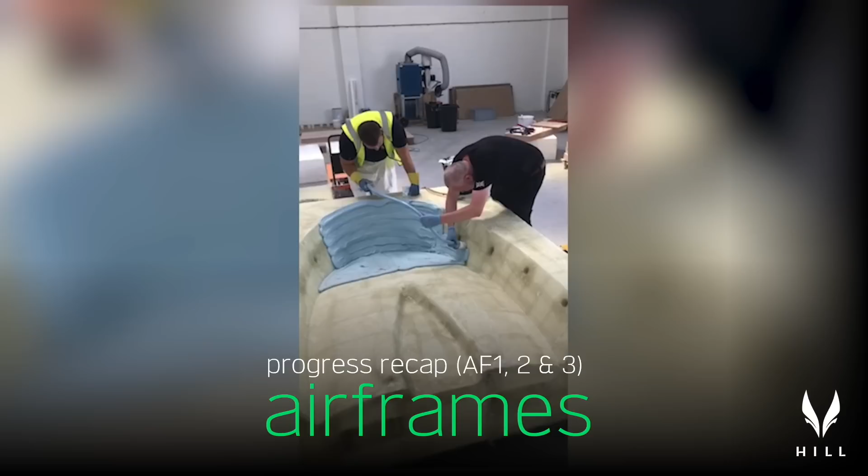Thanks a lot, Ruben. Thanks a lot, Misha. Welcome, ladies and gentlemen, back to DC1 for a crammed update tonight. The update will take the usual format. We'll start talking about the airframe developments that have been going on over the last month or so. We'll then get into engine and drivetrain, talk about the DigiCockpit and all the software and hardware developments, and then wrap up with some exciting news. So let's get started with the airframes.

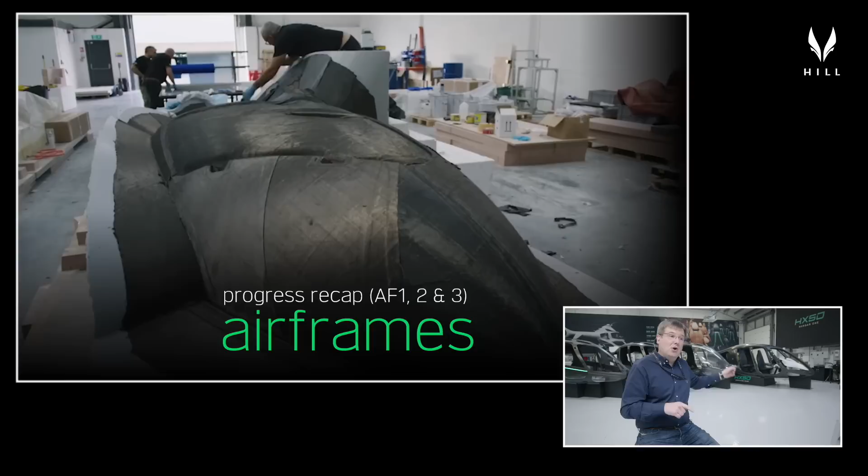As you'll remember, over the course of the last year we have developed a composites facility from scratch, developed patterns, developed molds, built the staff and the workforce, and then built no fewer than the first 5 HX50 airframes. Before we get into the details of what we've been doing recently, let's have a quick recap about what we've done over the last 6 months or so.

Airframe 1 was very much about making sure we could use infusion to develop cost-effective composite aerostructures for HX50. That's key to unlocking the power of composites at a price point that GA can afford. So this first fuselage was very much about: can we stick the dry carbon fiber into the molds? Can we hold it in place? And then can we distribute the resin around the mold effectively?

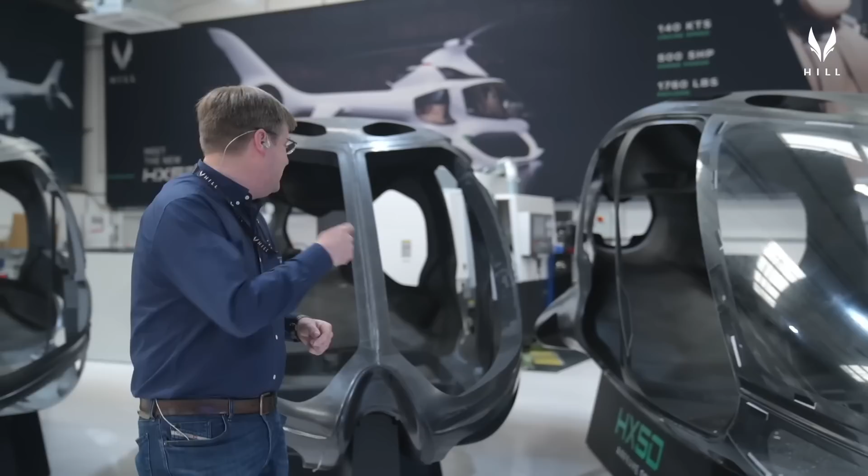We did that, and then with the second airframe we moved on to try and improve the detail in the molding—trying to resolve things like edge details, and starting to look at how we template and how we position the foams and the B surfaces into the mold.

The third airframe then allowed us to perfect that process on the outer skin. So by the time we'd got to the third one, we're resolving the edge details and all the intricacies of the carbon structure to production standards.

And then with Airframe 4, that was where we were due to bring all of the elements together. So let's go back and have a look at what we did with Airframe 4.

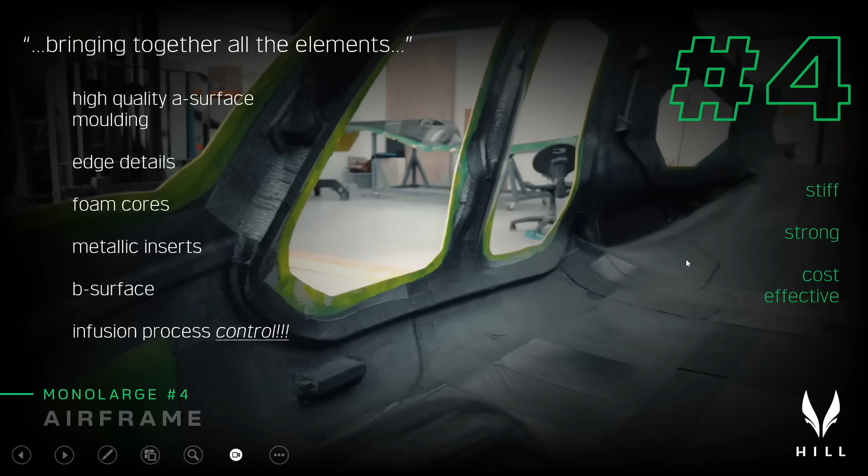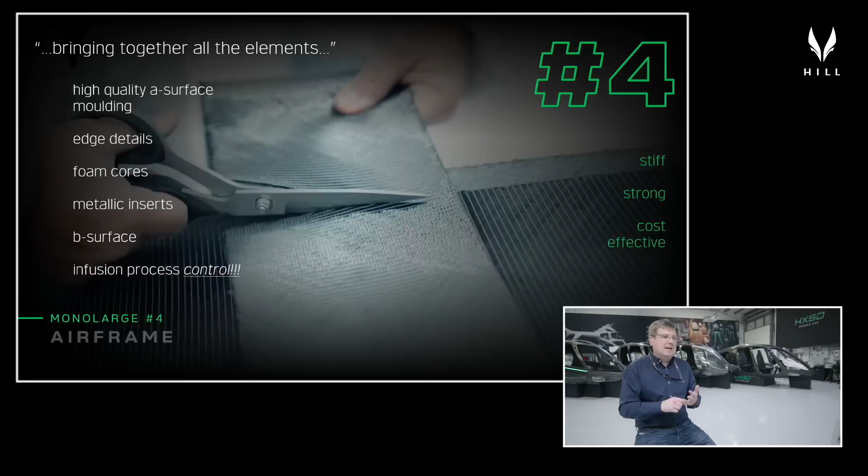Airframe 4 really brought absolutely everything together—everything that you needed to have a high quality, low cost aerostructure. All the edge details were in, all the foam cores were in, all the metallic inserts were in, the B surfaces were in there that give the structure its strength and its stiffness, and then it was about perfecting the infusion control.

Now this airframe was actually in the mold on the day of the last AMA, and as you'll remember me reporting, we had a vacuum hose come off and the thing slumped in the mold—a process failure, really. But that taught us a lot about infusion, it taught us a lot about process control, and when we actually got the thing out of the mold and had a look at it, what it taught us was these structures are incredibly strong.

So we were able to refine the process controls, we were able to refine the way that we do the infusions, and move on to the next airframe.

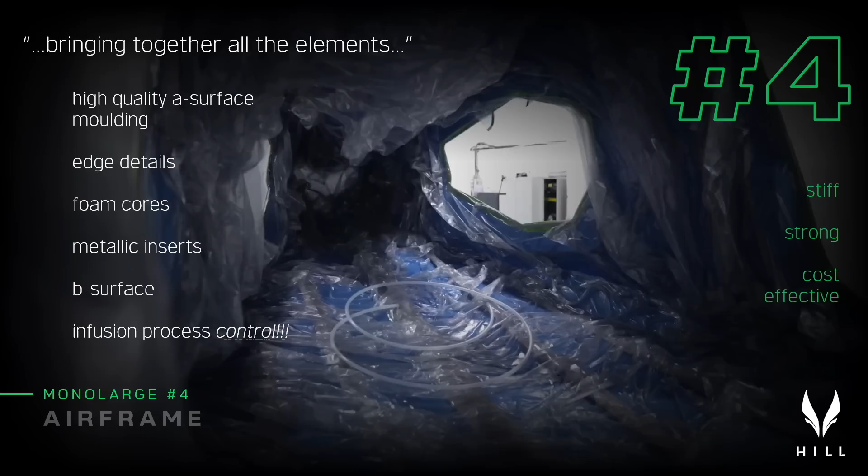But above all else, what that proved was we can make stiff, strong and cost-effective aerostructures using the processes that we've developed.

We then moved on to airframe number 5. This was really just a case of refining it, trying to get to the point where we're making a perfect aerostructure that's worthy of a structural test. So in this fuselage, we'd got a fully featured moulding, with both the A and B surfaces in there.

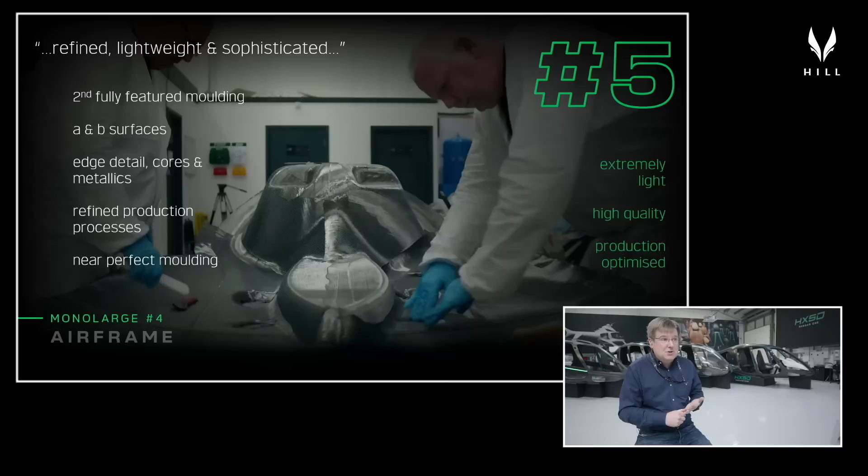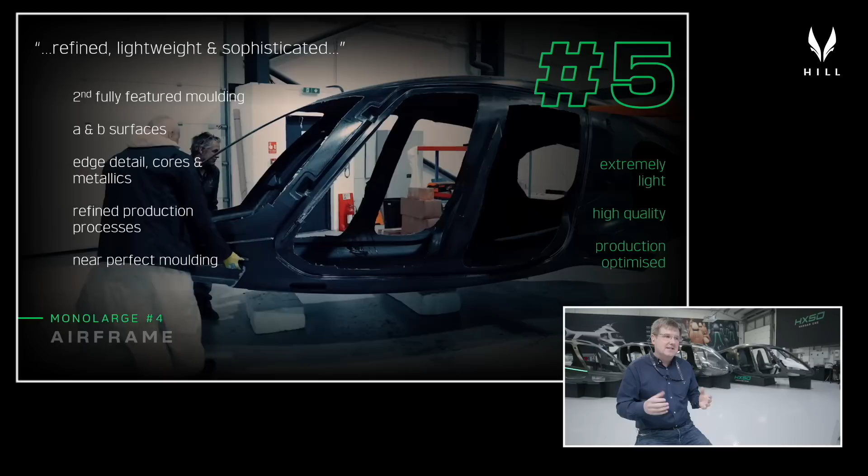Off the back of the latest FEA analysis we've been doing on structural optimization, and the findings from the inspection of the fourth fuselage, we managed to back the laminates off a little bit and reduce the weight dramatically on the fifth one. All the edge details, the cores and the metallics were in there, and we really refined the production processes to deliver what is a near perfect moulding.

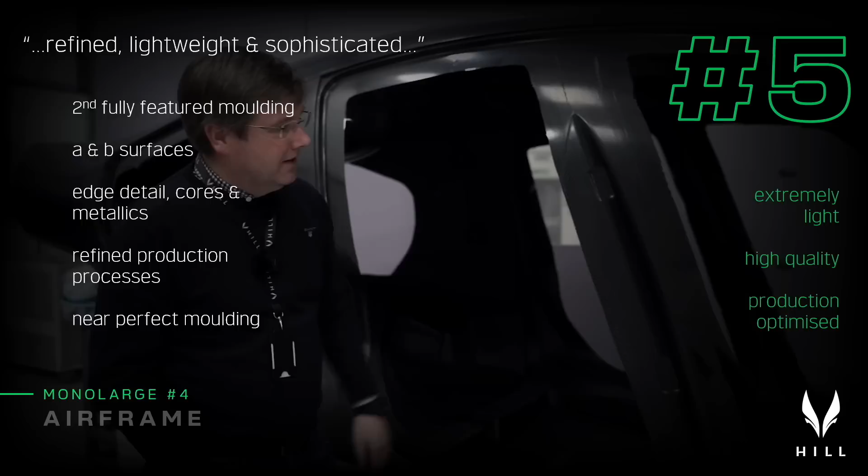And what we found when we got this out of the tool was this airframe is incredibly light. The whole monolarge, with everything in there - the foam cores, the metallics, everything you need to attach all the mechanical components - is just 50 kilos.

Now obviously it will put on more weight - we've got to bond in some internal panels to make the floors and the fuel tank closures, and we've got to put doors and windows on it. But we are on track for weight, we are on track for performance, and we're now able to produce these mouldings very cost effectively and very quickly, even without yet implementing the automation that will be used in production.

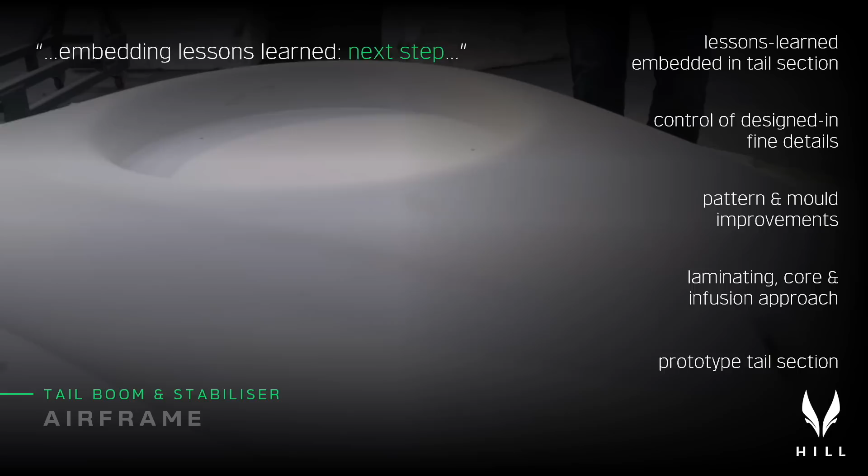So we took everything we'd learned from all 4 of these airframes and brought that together - from pattern making, mould making, all the way through to part making - to deliver what was intended to be a production grade suite of patterns, tools and moulds, using the tail boom, or the aft half of the fuselage, as a dry run for that. We basically embedded everything we'd learned in terms of vacuum integrity and surface quality.

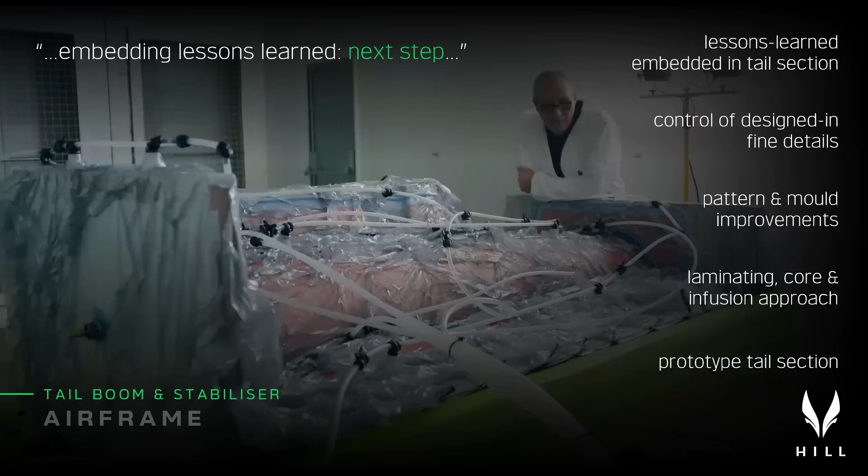We released all of the refinements on the gantry mill to get better performance out of the mill, better quality machining right from the get-go. And then we also took it as an opportunity to avoid designing in some of the challenging features that can make the production process more difficult - again reaping the benefits of that vertical integration, where the people that design the stuff are in the same company as the people that make and handle the stuff.

All of these things were rolled out, and over the course of the last month or so, we've actually built the very first HX50 prototype tail section. We'll tell you a little bit more about that later, but fundamentally, over the course of the last month, we've essentially got to the point where we're building high quality monolarges, and now we've built the very first HX50 tail boom as well.

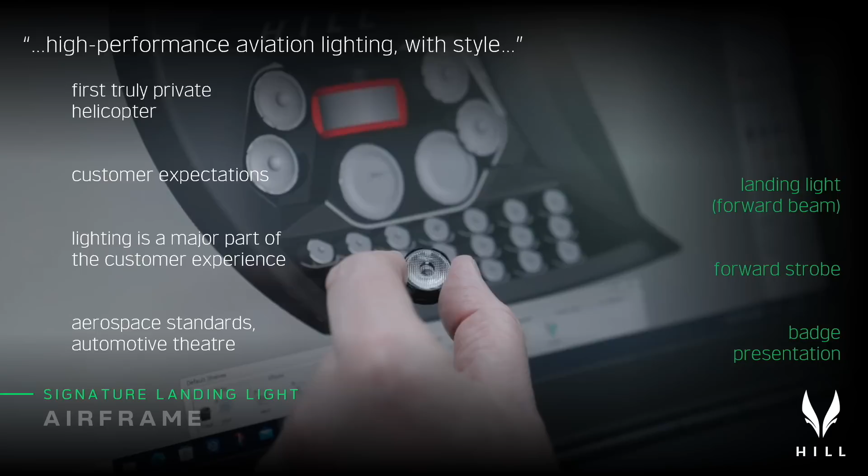So one of the other areas we've been working on over the course of the last 12 months is the way we deliver the lighting on HX50. We've set out to deliver the first truly private helicopter. And while we're speaking primarily to people already in the helicopter market, as our business grows and our market grows, it's important that we re-expand general aviation to what it used to be in the 60s and 70s - and to do that, we have to have broader appeal.

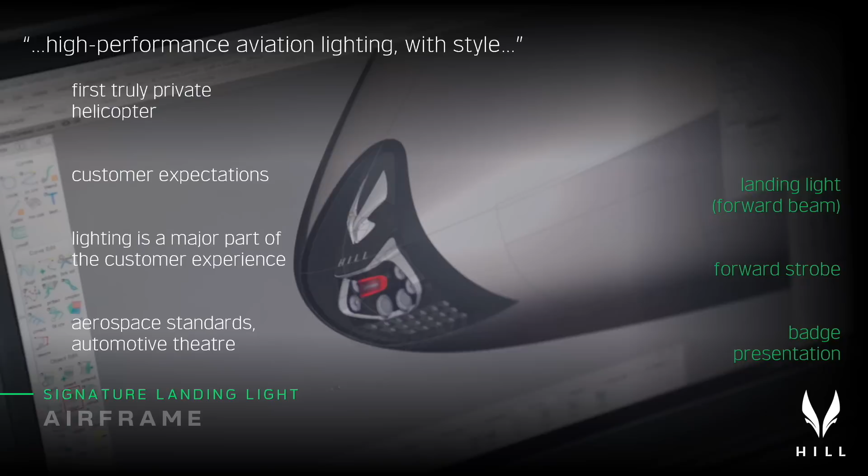So one of the areas we've been keen to excel in is making sure we exceed all of our customers' expectations in terms of the presentation of the aircraft, and lighting is one of the major areas we need to excel in to deliver this. So we're delivering aerospace standard lights that are fully compliant with certification regulations, but with the theatre of premium automotive lighting clusters. What we're looking at here is the nose cluster, which sits in the very front of the airframe behind the windshield.

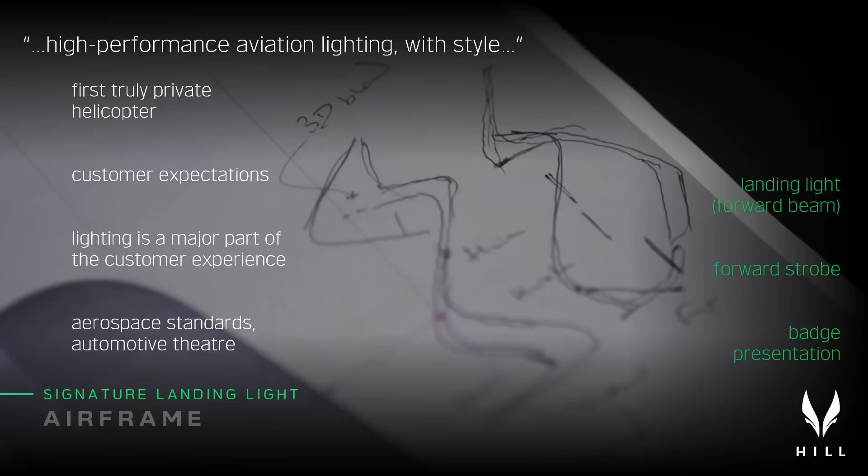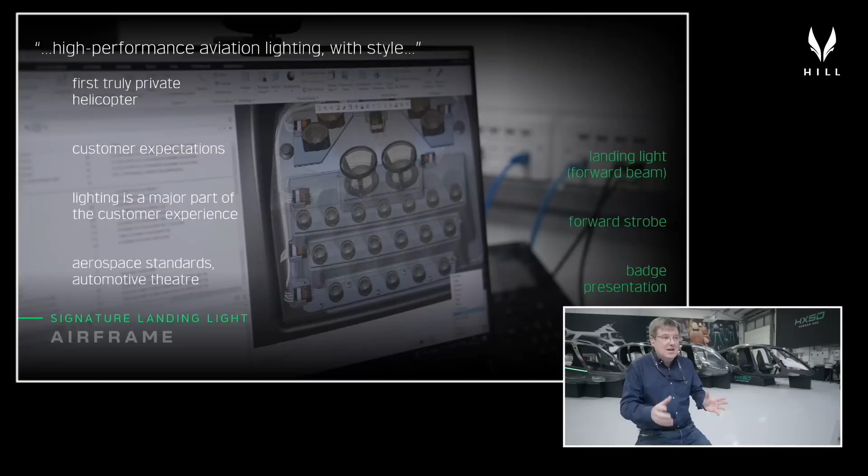At the top of that cluster, it presents a 3D form of the Hill badge, and below that you've got your dual focus long range and short range landing lights, which work in sympathy with the wingtip lights that provide a broader, steeper coverage. These lighting clusters are designed, manufactured and optically optimized by us here at Hill, to make sure we can deliver automotive grade lighting presentation and the jewelry that bedecks the body of the aircraft, at a price point that works for general aviation.

So within the nose light cluster, you've got the badge, the landing lights, but also the forward portion of the strobe light. There'll be much more on this over the course of the next couple of months as we prototype this and do all of the optical testing on it. But I thought you'd be pleased to see how this is evolving.

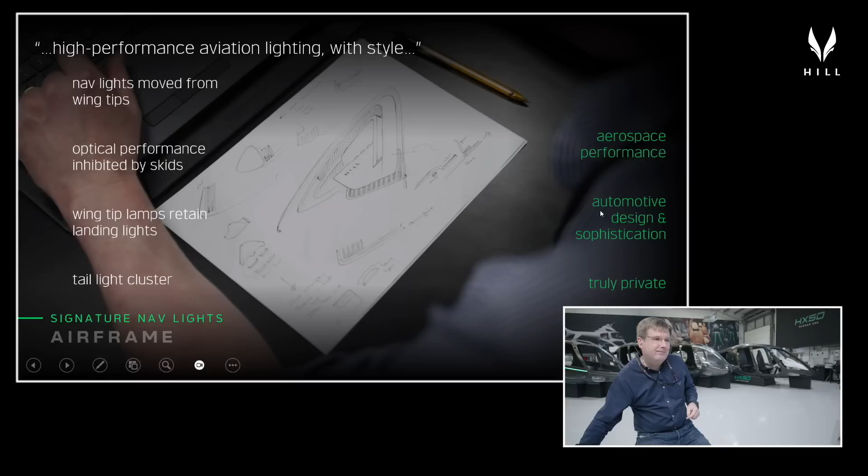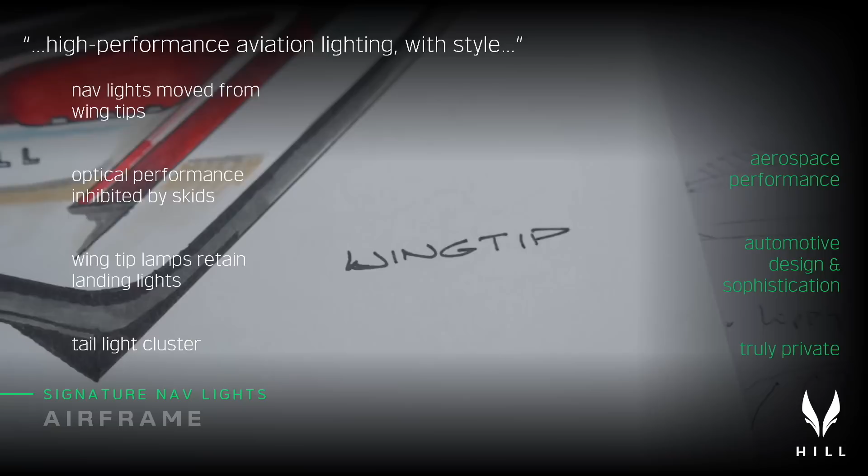Similarly, the wingtip lights originally were going to house both the green and red navigation beacons, and also a portion of the landing light. With the addition of skids to the airframe at customers' request, it now means we can't fully comply with the lighting in those wingtips. So we're now using the wingtip lights to extend the landing light coverage, and then present that in a way that dresses the airframe properly.

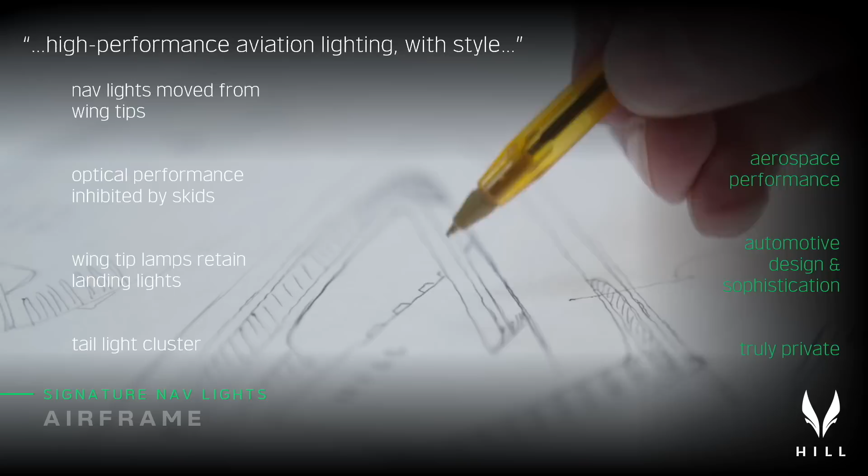Henry's been extremely busy over the last couple of months, refining this, fitting it in with the structural design of the aircraft, and working with Hayden, our optical specialist, to make sure all of these lights are fully compliant with the regulations. What you can see on the screen is where Henry's up to with the tail light at the moment, that provides both the aft navigation light and also the aft and lateral portions of the strobe light cluster. So again, aerospace performance, but automotive levels of design sophistication.

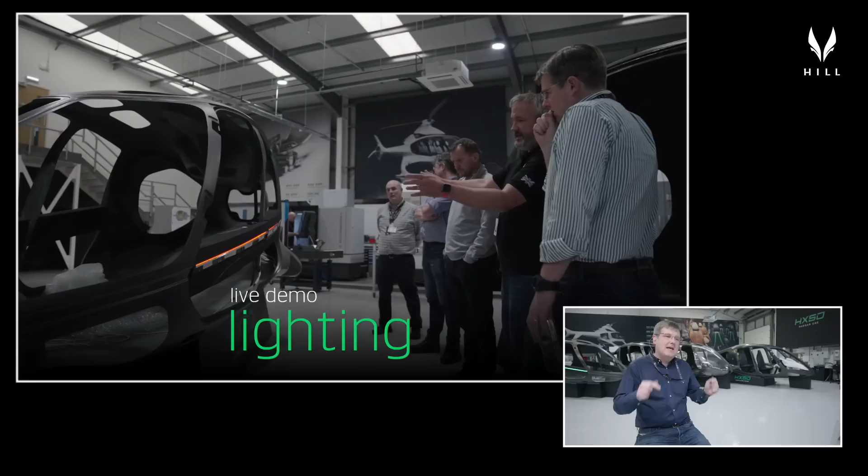One of the other areas we're very keen on is making sure the aircraft is presented essentially to the same level that a premium automotive car would be. Right from the early days, we've been discussing the idea of using a pinstripe of colour that runs along the top of the chrome strip, punctuating the waistline of the aircraft, to give you a sort of handshake when you first open the helicopter with your key fob. The lights will draw down to the nose.

What the guys have been doing over the last month or so is implementing the lighting clusters, the diffusion technology, and working out how to present that in a way that's subtle, classy, and compliant with all of the regulations. At the moment, we're just exploring a number of optical solutions for delivering everything we need before we put the high quality optics and finishes over the top of that.

But if we go over and have a look at fuselage 3 over here, what you can see is we've got one of the diffusive elements in the fuselage for the green navigation light. The idea is this light will be embedded in the door and the chin window here, and when you open the helicopter, it'll draw down to the front as you flick the navigation lights on. It sits behind polarizing filters, so you don't get any stray light where you're not meant to. And it works in conjunction with a primary navigation light that sits just down here to cover the range you can't quite get to with the stripe.

The idea of this is it just gives you a completely distinctive signature when you're flying at night in the sky, and brings the aircraft to life that bit more than a conventional bulb in a box would do. So we're really pleased with how that's coming on. Don't read too much into the presentation of that at the moment, that is purely an engineering trial, and the level of sophistication will come once we finish the nose and the tail light. So very pleased with how that's coming along.

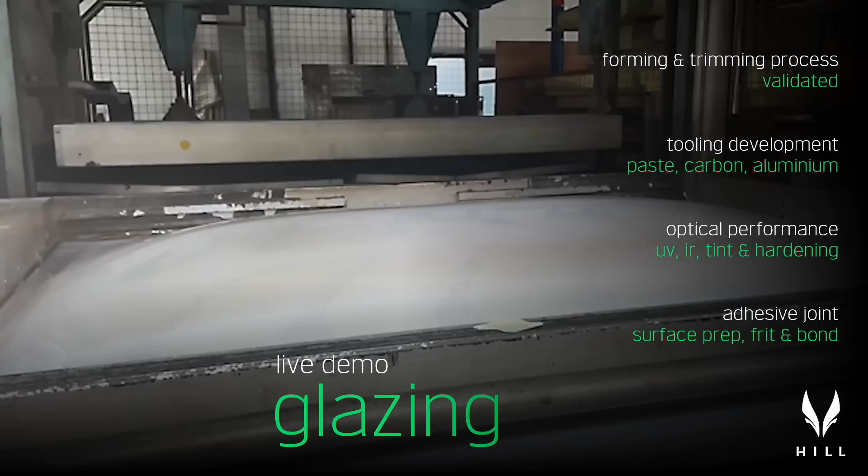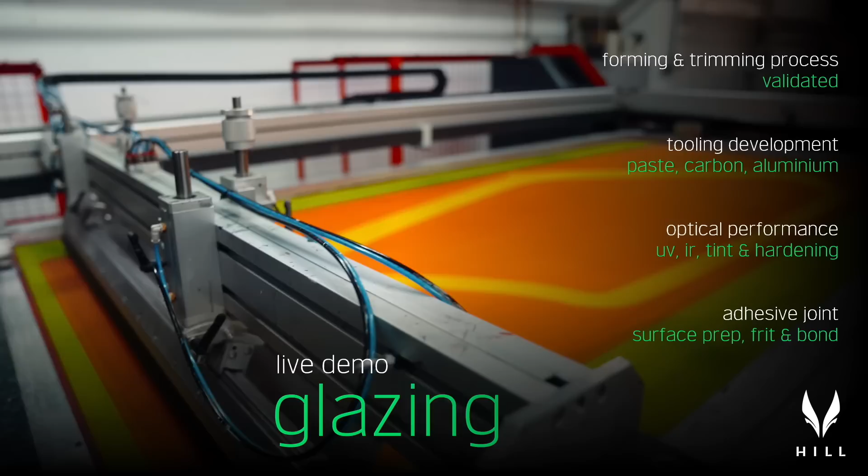One of the other areas we've been working on intensely with the fuselage and the aircraft development is the glazing. It's absolutely crucial, given the high cruise speed of HX50, that we have impact resilient windscreens. For that reason, and to control costs, we've been working over the last 12 months or so to develop the forming and trimming processes to produce both polycarbonate and acrylic windscreen panels that have the necessary UV, infrared, tint and hard coatings on them, as well as the blackout or frit around the periphery that allows us to create a high integrity bonded joint back to the airframe.

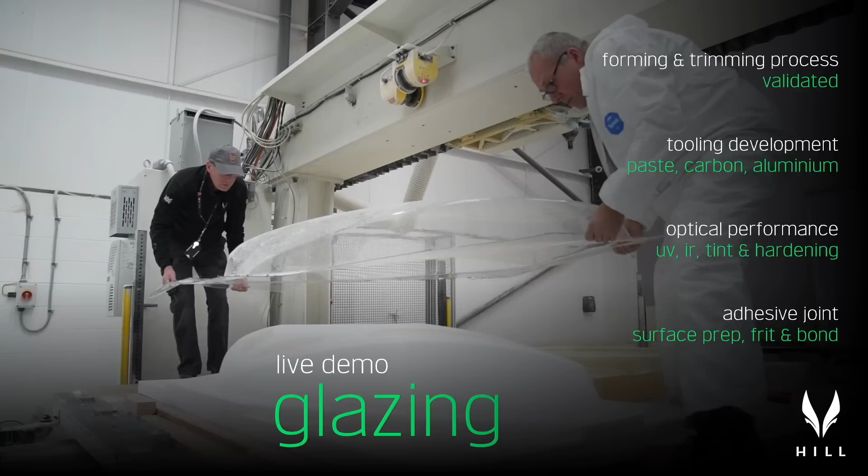What we've been doing over the last month or so is primarily focusing on the tooling, because in order to create the kind of optical quality you need, the blemish-free, distortion-free view through the transparent regions, we have to make sure the tooling we use is totally seamless. The original prototype tools we made for the windows were made in a low-cost way, just to prove we could physically form the shapes we needed using the vacuum forming process.

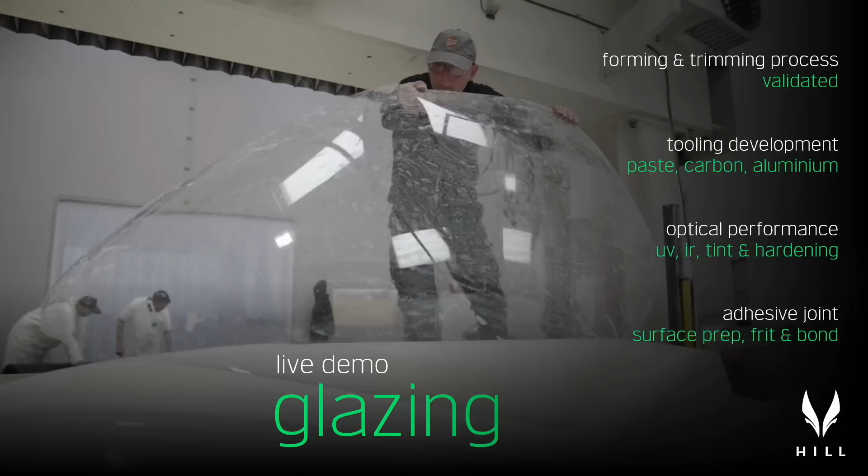We validated that, and now we've got to take the tooling to the next level to make flyable aircraft parts without any optical distortion. We're proving this process by cutting back and pasting up some of our existing tools, and then once we've done that, we'll extend that to either carbon or highly polished aluminium tooling to get the optical quality.

What you can see the guys doing here is proving out the trials of the polycarbonate and making sure that we can physically trim and handle the polycarbonate in the same way as the acrylic.

The other thing we've been developing is the physical frit or blackout layer, which I can show you down here on the floor. What you see in front of you is one of the recent moldings of a forward windshield panel. We've got a high quality optical molding here, but we also have to create this blackout region that sits within the area we trim the window, and this allows us to essentially hide the bonded connection that goes back to the airframe.

The other little details we're building into this is the dot fade that we use to give it that air of sophistication and to present it in the same way as you'd expect on an automotive vehicle, so you don't have that harsh black line where the airframe transitions from solid opaque material into the transparency. And all of that has been carried over.

We've still got a bit of work to do in terms of finding the right combination of the frit material and adhesive so that we're not limited by the adhesive strength of the blackout ink or the coating we use here. At the moment, that's not quite strong enough, so we need a little more development on that. But aside from that, in terms of the process, the delivery of the printed blackout and the tooling solution for this, we're flying along with it at the moment. So really pleased with how that's coming along.

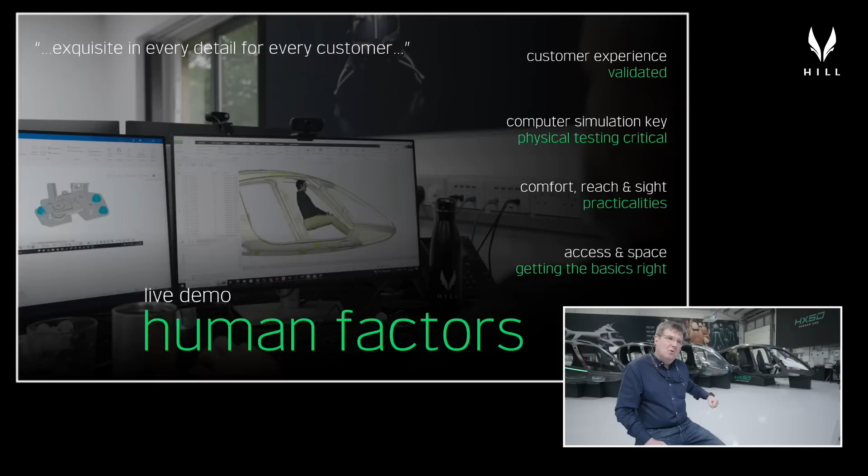So we want to make sure everybody's comfortable. We want to make sure the view's right. We want to make sure that collective, which some people find novel, works as we expect it to with the armrest. We want to make sure that the cyclic range works as we want it to, and we want to make sure the access is right to the aircraft also.

So what we've done is we've turned Fuselage 4 into a human factors mock-up, and what I can show you now is some of the key findings from doing that piece of work. Don't be put off by the appearance of this — it's meant to be quick and dirty, just to validate as quickly and effectively as we can that all of the features we need to work properly in here work properly.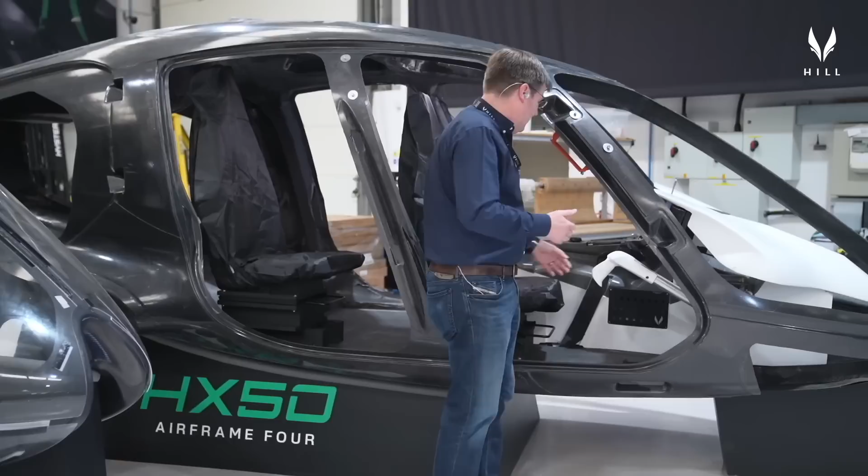If you just come around here a second, Josh, what you can see here is we've presented a lot of the airframes previously about 100 millimeters higher off the floor than they sit in reality. This airframe has had its base cut down and sits at the actual height that HX50 will sit at on both wheels and skids. I'm 6 foot when I stand up straight, and the seat is at a convenient height for me and for people a little bit shorter than me. One of the benefits of our cyclic is that you can lift it up out of the way to slide in underneath, so access into the helicopter is comfortable and fairly straightforward.

The first thing you realize when you get in is that everything we wanted to deliver in terms of the cosseting flying experience is delivered in spades with this. The digital cockpit looks absolutely fantastic.

My personal concern that this was going to block too much of the view was unfounded. I can see easily less than half a meter in front of the nose of the helicopter, and that's without using any of the transparent background technology we've got on the DigiCockpit.

The start panel falls immediately to hand, so starting the helicopter is as simple as power on, avionics on, start, and the reverse to shut it down. The collective, which some people found a little contentious at first, falls immediately to hand and sits really comfortably in the normal flight position.

As you can see, my arm comfortably clears the armrest, and it's quite easy to rest my elbow on the armrest while the collective's in the flight position.

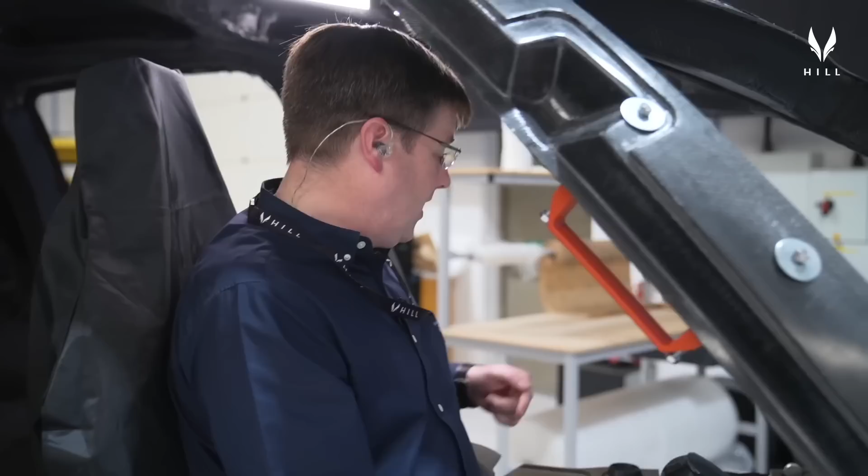Just as intended, Josh, if you want to come around here, the Digi cockpit and the IPI sits right next to where my hand rests naturally. So my hand rests where the puck falls, and the IPI for our audio panel, our comm radio selections, or any of the other key functions are immediately at hand as well.

The general presentation of the cockpit, the aspect out of the fuselage, the room and space that I'm afforded is everything we wanted it to be. And of course the full-size iPad front and center in the cockpit works really well too.

We've been exploring the level of adjustment we wanted to include in the aircraft. The seat range allows for someone up to about 6'6", and slides forward to someone well below the 5th centile, so we've got adequate room for the largest and the smallest.

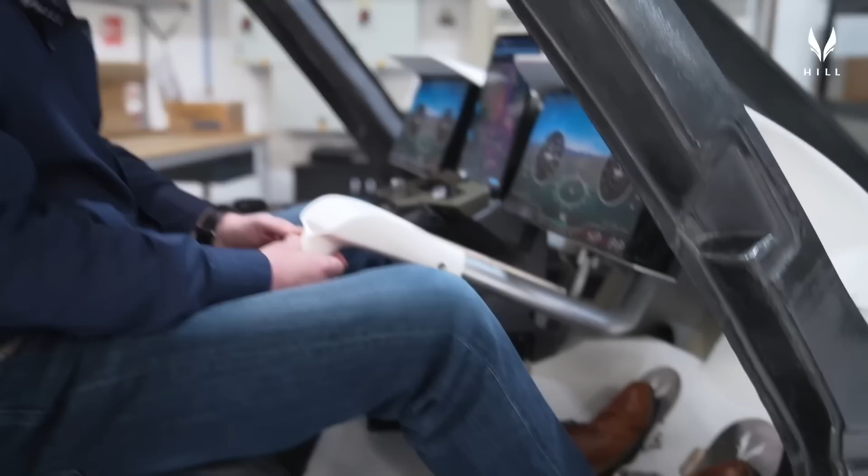The cyclic range is comfortable for everybody in that size range as well. The only thing I think we're going to end up altering before we go flying is the range of travel on the pedals - I think that's a little too little at the moment, and we need a bit more adjustment on the pedals.

But overall, the overall experience in here has been really fantastic. I'm delighted with how this has come out. Very pleased with how all of that's come together.

There are a couple of areas where some of the structural developments in the aircraft have impeded a little bit, which we're going to refine slightly before we build the next fuselage, but nothing major on that front.

You may also note we've put a couple of dirty grey handles here - these were just for engineering purposes. We've been trying to work out the most convenient place to help shorter people swing in and out of the aircraft. This won't be a rigid handle in practice, it'll be a leather strap, but we found that location is really convenient to allow you to swing in and out of the aircraft, irrespective of your size.

The other thing we'd point out is that we've maintained the stadium seating, so you have a flat floor across the aircraft, but we've still got a level of stadium seating that ensures everybody who sits in HX50 has an amazing view.

We've popped a little handle up here just to make it easier to get into the back. And what you find from here is, if you follow the waistline down, the armrests are in exactly the right position. The 500 millimeter wide seats are perfectly adequate for 5 fully grown people.

The beauty of having the slight stagger between the front and rear seats is everybody gets a great view. I can see straight over the pilot's shoulder, straight out of the pilot's side window, and I've got a great view here too. Lots of shoulder room, lots of headroom, and easy access to the roof console for the air conditioning and other bits and pieces we've got in there.

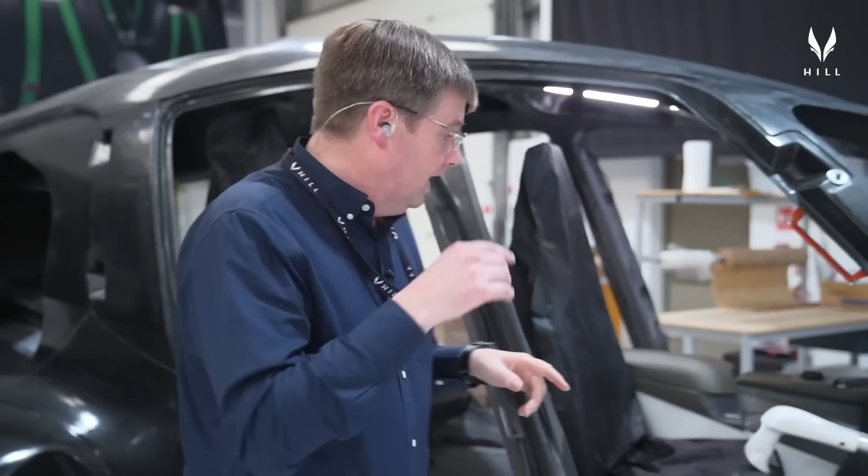Overall, really pleased with how this has come together. There's a couple of details you won't necessarily make out until we put the bonded-in floor panels in there, but these open flanges you see on the structures - the floor actually butts directly up to those, and we've got some

metallic finishes that go over there, so all of the open flanges are either protected by ruggedized seals or by finishers, so you're not going to damage the core structure of the aircraft.

So overall, the human factors exercise has been really helpful - very quick and dirty, but it's just validated that everything we wanted HX50 to be, it really is. You're going to love it.

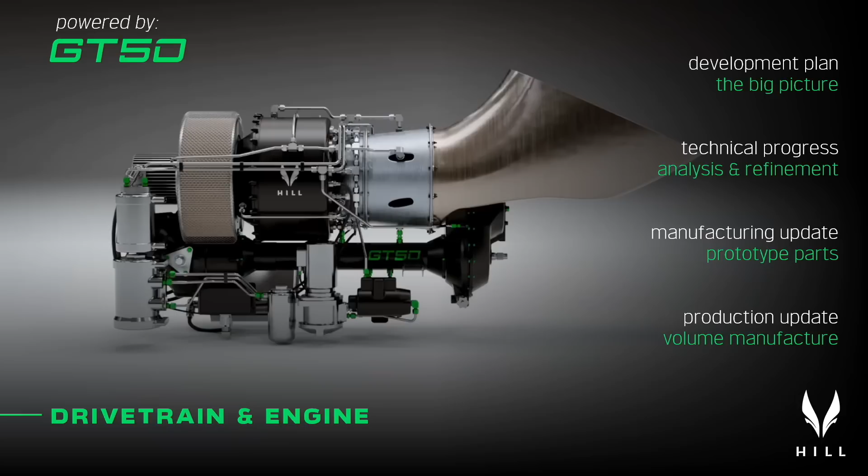Okay, let's talk about the GT50 engine for a second. A lot of the effort in the company has gone into the GT50 engine development, in particular the march towards freezing the final elements of the engine, getting the engine components built, and then getting a phased build of the engine and release to test.

So I'm going to talk a little bit now about the test program we've got lined up for the engine. I'll talk about the technical progress made over the last month or so, give an update on the parts we've been manufacturing, and also an update on the production equipment for the various parts of the engine that we've been procuring and have been arriving here at DC1.

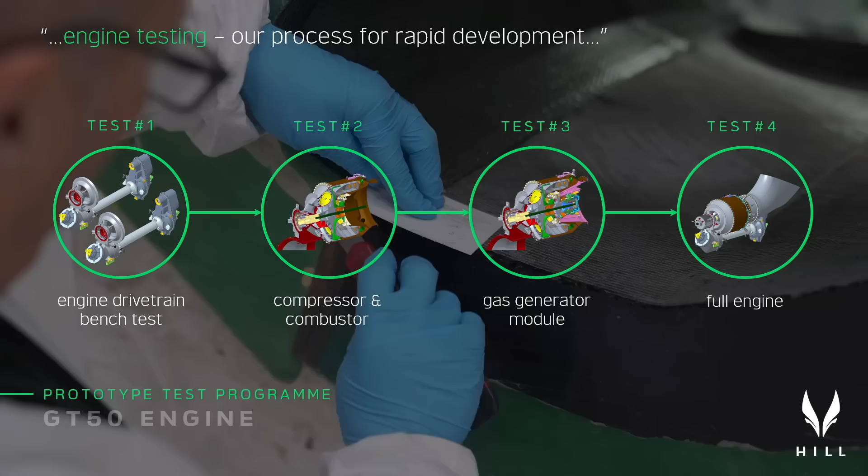So the way we're going to test or do the development testing of the engine - this is the testing that just proves the engine works. There's obviously a plethora of certification testing that comes later, but this is how we're going to get the engine to the point that it runs, it works, and we've proven that it's reliable.

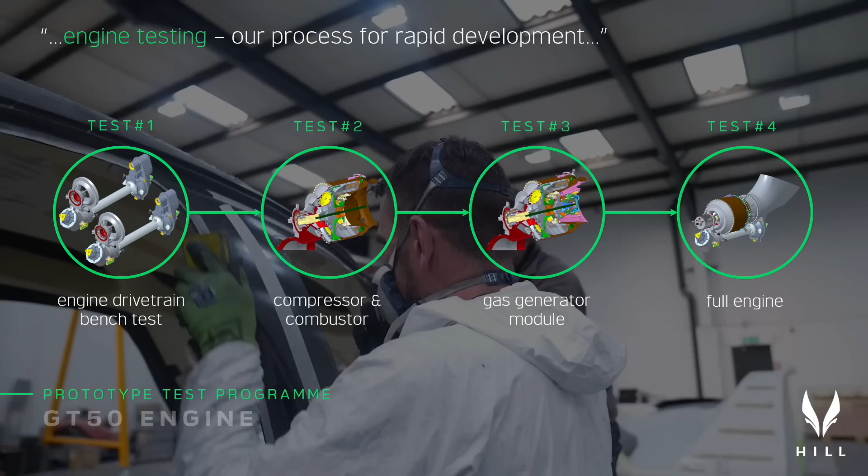The first stage of testing will be essentially to test the starter generator and the mechanical drivetrain that takes the power from the power turbine, reduces it down to 6,000 RPM, and then squirts it into the main rotor gearbox. The reason for that is those components are actually the bits that are furthest advanced within the manufacturing cycle.

So I'll show you later that the actual flying components, the bits that will fly in the prototype aircraft, are being made at the moment for the drivetrain, and we expect to have those components on test over the coming months. So the first test will be to get the starter generator working on a bench and test that.

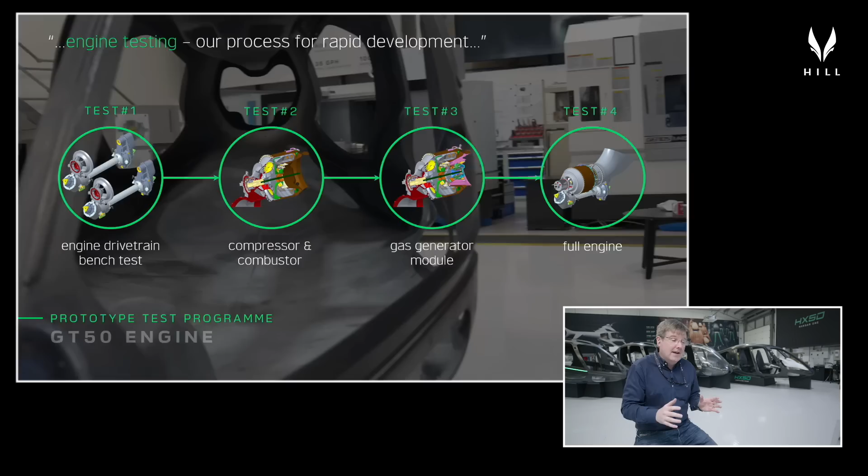The first test will be to have two of the engine drivetrains running on a bench. This will run through the entire operational range of the engine, but then it will also go on and do the full 5,000 hour endurance proving runs to demonstrate that those gearboxes will work throughout the entire life of the aircraft.

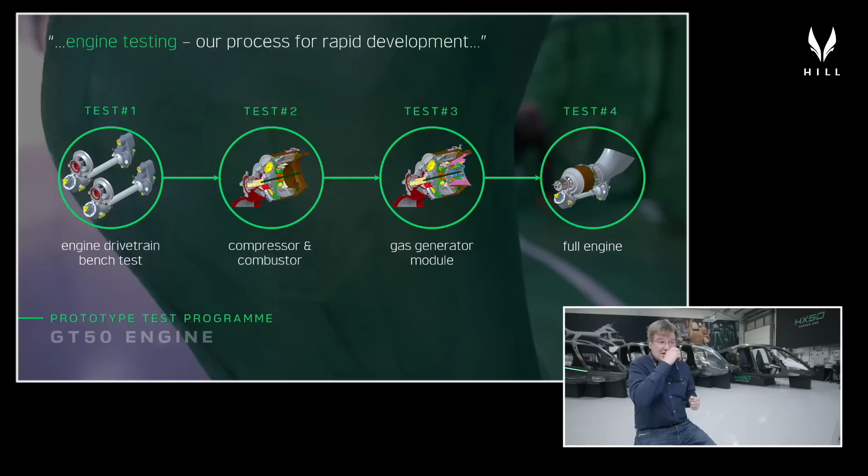The second test is then to take the starter generator, the compressor, the diffuser, the combustor, and perform a light-off test - prove that the compression system works at the lower parts of the operating map, and that we can physically ignite, sustain stable combustion, and run stably in the early stages of starting.

Once we've done that and proven that the combustor works, the fuel system works, the igniters work, the compressors work, and the bearing and lubrication systems work, we then pop the gas generator module onto the back of the engine, and then we essentially have a jet engine.

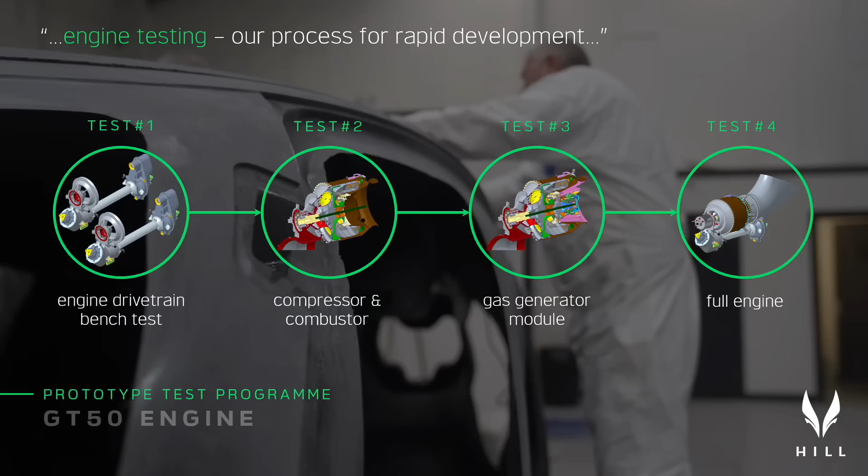That allows us to run the whole gas generator module throughout the operating range. It'll function at that point like a jet engine rather than a turbo shaft, but it allows us to qualify the main working core of the engine.

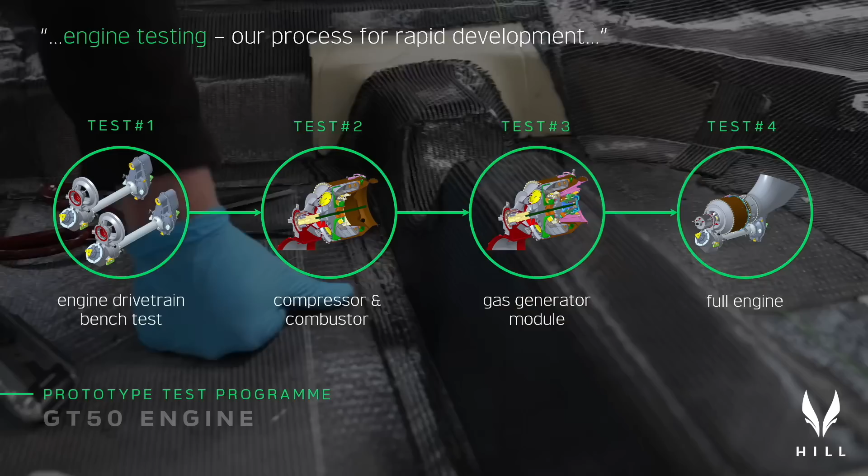The next stage is then to attach the power turbine, attach the drivetrain we've already proven, and then you have a full GT50. This is the program we're working through at the moment. So we're building the components for test on the engine drivetrain. I'll show you shortly where we are with releasing the other components for the gas generator section, and the equipment is now here to build those parts.

So if we just talk about the two core elements of the engine for the moment, on the gas generator module - that's your compressor, your diffuser, your combustor, and your compressor turbine, and all the associated secondary air systems - this is now very, very mature.

We've got a compressor that is essentially frozen, both aerodynamically and structurally. We've got a high pressure turbine, a gas generator turbine, that's aerodynamically frozen and pretty much structurally frozen now. There's one last little natural frequency we need to move slightly, and then that's done. We've already built the first demonstrators of both the compressor and the gas generator turbine.

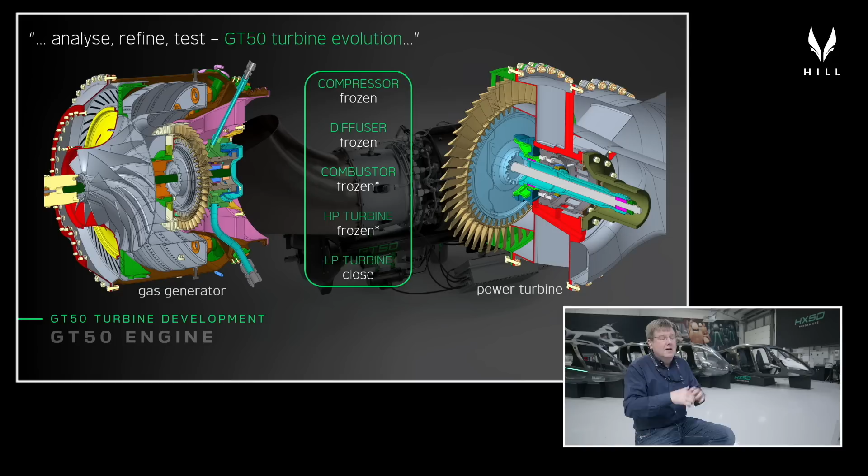The combustor is essentially frozen aerodynamically, from a thermals point of view, from a combustion point of view. We have one small tweak to make to the back end of it to allow for some extreme cases of thermal expansion, and then we'll be starting building that immediately. I'll show you shortly that all of the production equipment we need to build that is now here, and the materials are here to build that as well. So the combustor will be coming to life very shortly too.

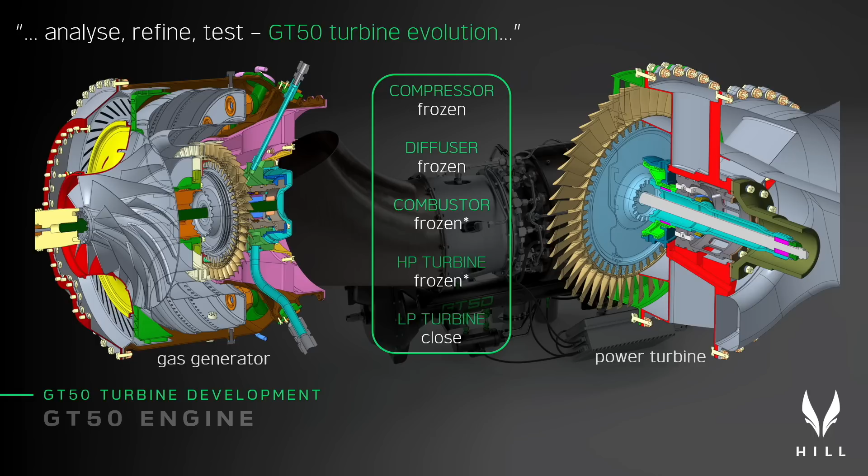And then the power turbine that you can see at the back of the engine - again, I'll demonstrate that we've built the first demonstrator for these components. We're just waiting for the structural optimization on the new fir tree roots and a couple of blade frequencies to be optimized, and then that too can be built to get the whole engine running.

One of the things we've been working on recently is the move from single piece cast blisks over to bladed discs. That's where you make the rotating disc and the individual turbine blades separately. The reason for that is fir tree blades have profound benefits for the life and performance of the engine. These fir tree features, however, are traditionally broached, which is quite expensive and quite an aggressive process. Modern manufacturing methods, such as EDM machining and wire eroding, allow us to cut these fir tree features far more cost effectively, with a far lower capital investment to do this.

So one of the things we've been doing over the last 2 months is developing the necessary processes to spark erode these fir tree features and then validate the geometric accuracy we can produce them to, the tolerances and repeatability of the process, and importantly, the impact that using this process has on the metallurgy of these superalloy parts.

Traditionally the early versions of these machines would melt and then recast the material locally, which would have a really negative impact on the performance of the material. It would locally oxidize it and cause all sorts of problems. Modern processes don't do that, and we've been doing a lot of work recently to validate that. We've got a specimen about to be sent out today that'll be cut up and examined to validate this. Fundamentally, we've got a process now for making these fir tree roots much more cost effectively than previously, and very, very quickly indeed. Really pleased with how that's coming on.

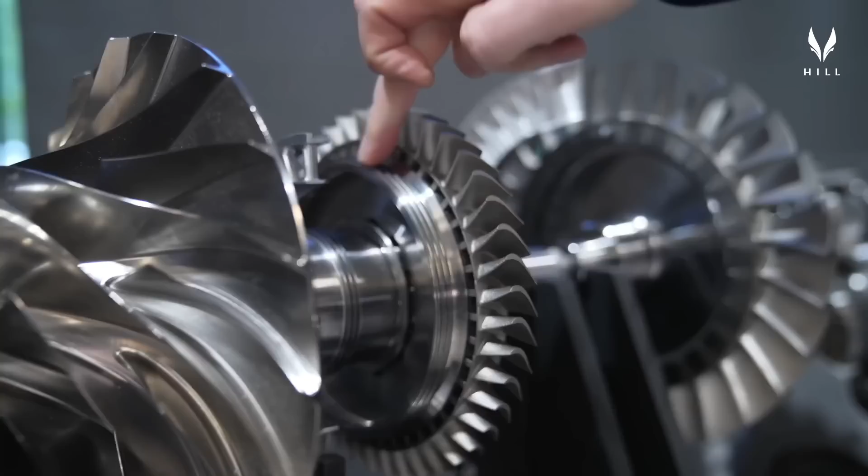We've also developed all of the labyrinth seals and the curvic couplings we need to align the shaft. We've gone from our 2-stage cast Blisk gas generator turbine to the single stage bladed disc. So this is the new turbine. You can see the bladed disc in there. We've got a new sealing plate here that also retains the discs in place. And then if you look from the rear here, Josh, you'll be able to just about see the fir trees that retain the blades radially.

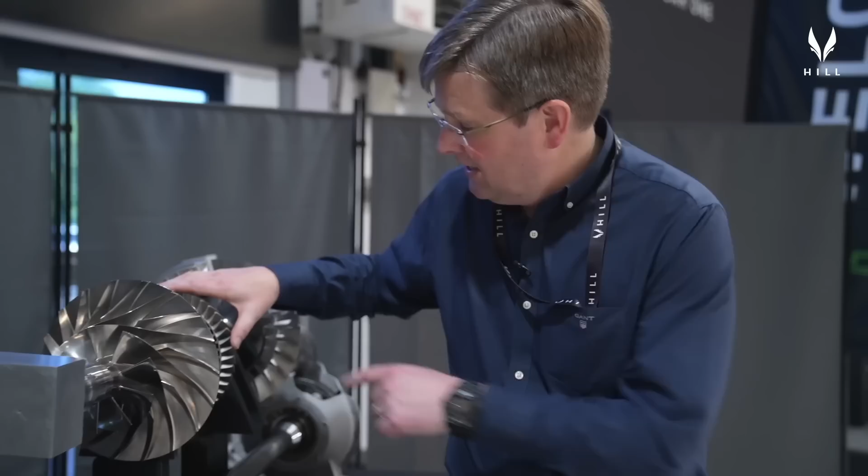So that's the gas generator rotor, and this turbine itself produces around 1,000 horsepower that we need to spin the compressor up at 46 to 50,000 RPM. So that's all coming along very nicely. Those components, as you can see, are mature, and the only thing we've got to do is substitute these prototype blades now with the cast ones. The other processes here are completely representative of our production intent.

We've now also got the power turbine, the low pressure power turbine. Again, it's moved over to a bladed disc. This has been manufactured using the wire eroding processes that I've just outlined to you. So machined here and then wire eroded. We've cleared the geometrical accuracy that we need for the fir trees themselves, and we're just waiting for the final sign-off on the metallurgy of the fir tree to validate what we've done here.

And again, these are the new turbine blades that we've developed. You'll notice a very, very slender, high-performance aerodynamic profile, much thinner than we started with on the cast power turbine. And then importantly, what you can see behind me is you'll be aware that we've been manufacturing the high-speed reduction gearbox now for some time.

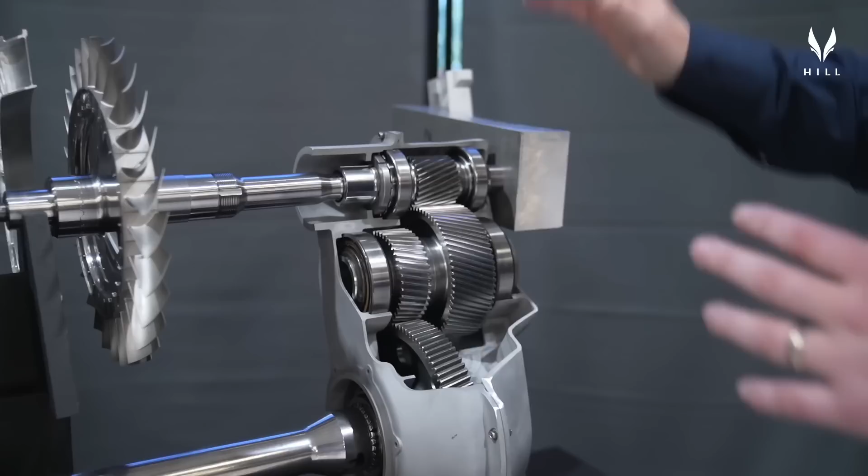So all of these components in here, the gears and the drivetrain components, are manufactured here. And this is the speed reduction gearbox that essentially reduces the power turbine output from 36,350 RPM down to 6,000 RPM on the output drive shaft. And so as this thing's whizzing around generating your 500 horsepower, that pops out at the front here to go up to the main rotor gearbox at about 6,000 RPM.

So really pleased with how this is coming on. In the interest of doing this demo today, these are our gears, but we've had some cases rapid prototyped because we hadn't got enough capacity on the 3-axis, but we'll be replacing those cases with our own shortly. And again, we're getting ever closer to being able to get a pair of those strapped together and run the endurance test for the drivetrain gearbox. So really pleased with how that's coming on. Literally, as soon as Craig's finished the final life calcs, we're away. We can get that built and get it on the test rig.

So, one of the other key areas for our drivetrain, both in the engine and also in the main rotor and tail rotor gearboxes, is bearings. Now, we get asked all the time, why on earth would anybody try and make bearings? It's purely down to economics. There's a helicopter tax, if you like. When people know where they're going, the prices become completely intolerable. So we've had no choice but to develop the means to make bearings.

Over the course of the last few months, we've been developing the processes, the handling, creating the kinds of controls in the manufacturing environment we need to be able to do that. And today, I can report that we've successfully completed all of those steps, and Hill Helicopters can now make aerospace grade bearings, right all the way up to the 50,000 RPM bearings that run in the engine, down to the low speed, more commodity units that we use in the main rotor transmission and elsewhere in the helicopter. With the equipment we have here, we are hitting the tolerances repeatably to make these bearings.

We've also now pulled together all of the remaining bits of equipment that we need to be able to super finish the raceways. We've identified that kit. We've got a subcontractor to do it for prototyping, and we will buy the equipment for production. So the raceway super finishing has also now been developed.

And in terms of the first bearings, what we've got here, this is the first gas generator bearing that we've produced. So this is one of the bearings that is most expensive to purchase externally, and we've now hit all of the tolerances that we need to in producing these bearings in-house. So really pleased with how that's coming along.

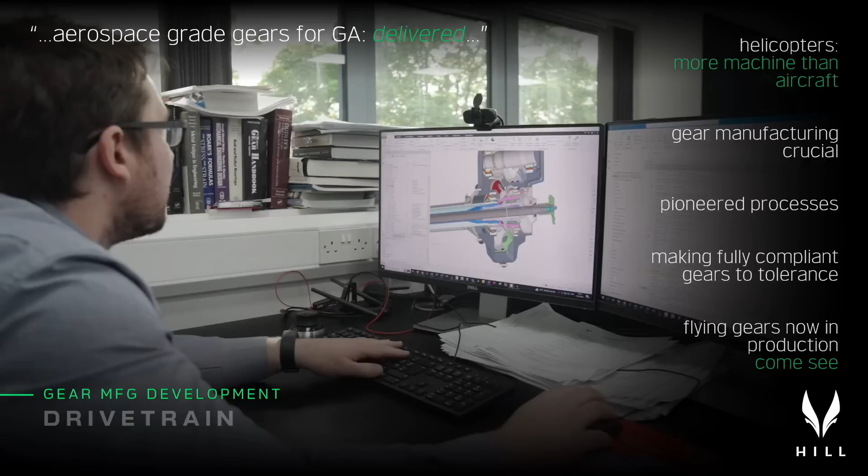So let's talk about the aerospace grade gears. You've watched us over the course of the last year or so develop all of the processes we need to make gears from high quality certified material that are fit for use in a certified helicopter. And helicopters are far more machine than they are aircraft.

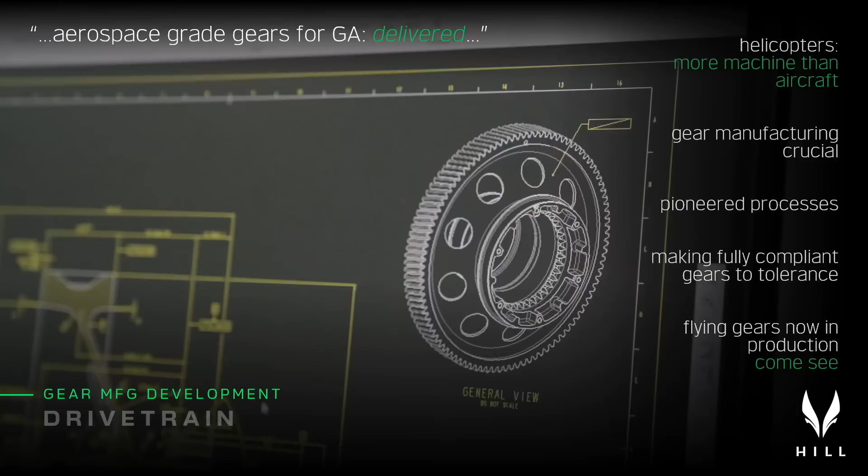So being able to make these mechanical components is the essence of any helicopter manufacturing company. What we can report today is that the work we've been doing prototyping the gear, using commodity CNC machines and very careful process control, has got us to the stage where we can make hardened aerospace gears to the required process controls that hit all of the tolerances. We're absolutely delighted for that.

If you come over here, I'll show you that the gears that are going to go flying in the GT50 engine and in the main rotor gearbox of all of the prototype aircraft are now being produced. I can also show you the metrology reports that show every single one of these gears is hitting the tolerances.

The first stage in this process was to develop the overall main rotor transmission, the engine drivetrain, and develop out all of the gears we need to make that system work. Behind the scenes, Mark, Mick and his team have been developing all of the sophisticated process control you need to make all of these gears repeatably to the tolerances you need.

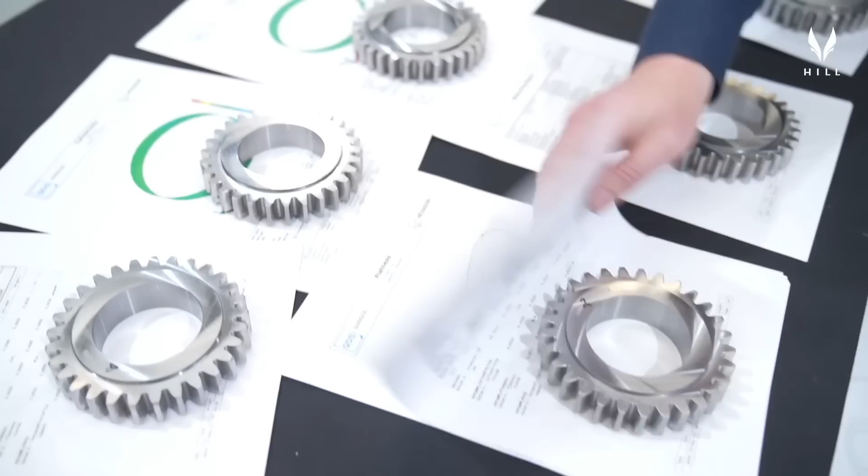What we've got here is the batch of gears that are going on fatigue test to validate the life of all of the gears we use in the aircraft, prior to running the big expensive tests on the whole aircraft drivetrain. If you look at any one of these reports, you'll find that every single parameter - cylindricity, roundness, flatness, profile, surface finish, run out - all of those exceed the requirements of any existing certified helicopter manufacturers.

So in the space of just over a year, we've gone from procuring the equipment and the personnel to do it, developing the processes to work at this level, and then delivering repeatably and reliably aerospace grade gears in the right materials to the right standards.

What you can see in front of me here is the fledgling batch production for all of the components that will be going flying in and doing the bench testing on the ground for the actual prototypes. These components are for the speed reduction gearbox I've just shown you, and they're closely followed by everything required for the main rotor gearbox and the tail rotor gearbox.

So Hill Helicopters can make aerospace quality gears and aerospace quality bearings repeatedly with what we have around us here. So, good news.

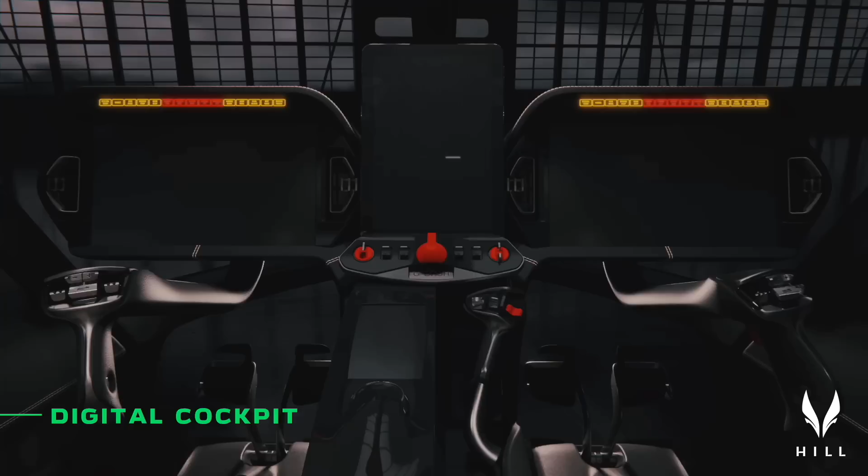Okay, let's talk for a moment about the digital cockpit. There's been an awful lot of work going on over the last few months that we've been updating you on periodically. The main focus has been moving over to target hardware, implementing real physical hardware, and getting our software fully developed out.

One of the big things we've been focusing on recently, working with our control partners and the in-house team, is the development of the FADEC system. The FADEC system gives us that ultra-tight RPM governing of the main rotor speed. It gives you the easy start and stop functions on the engine, carefree handling of what is a very sophisticated gas turbine engine.

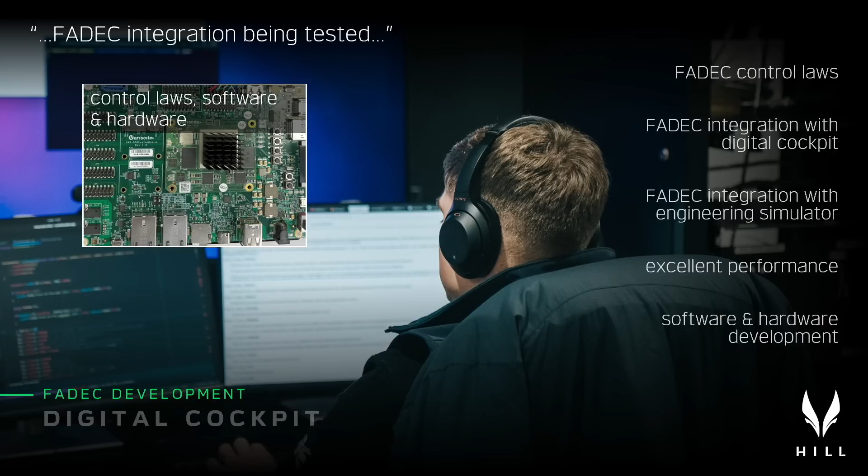So where we've got to over the last month or so is we've now fully developed all of the FADEC control laws - the algorithms that tell the fuel valve what to do to manage the RPM the way you want it to. We've integrated the FADEC with the digital cockpit, and also with our engineering simulator, so we can fly the HX50 in a virtual environment and explore how the FADEC system behaves in different regimes of flight. What we've found is we've got absolutely outstanding performance.

So with 0 to 80% to 0 to 80% to 0 to 80% in about half-second periods, the rotor RPM doesn't droop by more than about 0.5%. So it is extremely tightly governed.

Now, we've obviously got to prove this out on the physical engine, and that performance might move around a little bit, but overall, with the fast-acting electronics, the fast-acting fuel valve, and the very short time constant that engine's got, when you take into account the anticipation functions built into the control laws, we have an incredible engine management system for you. We'll talk a little bit more about that with Eric shortly.

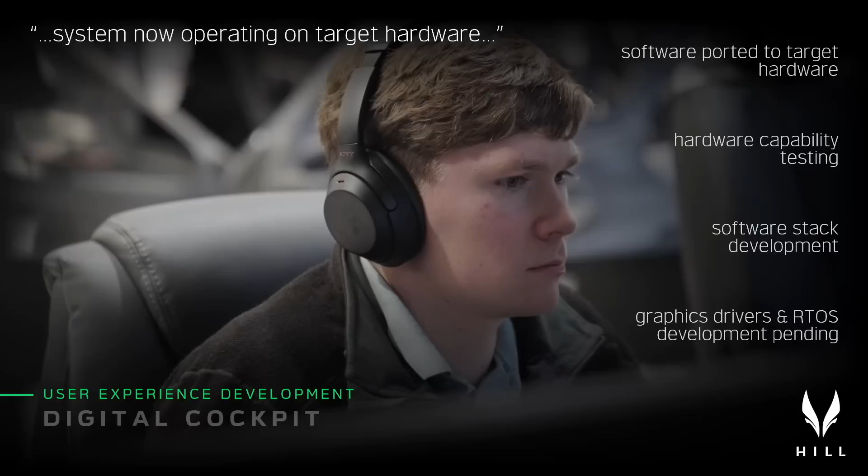One of the other big areas we've been focusing on is pushing all of the user experience onto target hardware. The initial development of the user experience was done on a PC platform to allow us to quickly and flexibly develop, but we need now to put that on target hardware, little circuit boards and processors that we can package and meet all of the environmental certification requirements to go in the helicopter and then take that flying. So Eric has now ported all of the DigiCockpit software onto target hardware.

And we have our user experience running on our target hardware that is essentially now very close to being able to go flying. There's still some software stack development to be done for HX50, taking that all the way out to certified graphics drivers, real-time operating systems, and those two programs will merge before production. But fundamentally, we can now run the DigiCockpit on target. It's been a very big and demanding job, and Eric will tell you all about that shortly.

In other big news on the DigiCockpit, we've also expanded the software development team. Ganesh has joined us, and Zenu has joined us on the electronics side. This has basically allowed us to push forward on a number of areas. The power electronics that drive and control the starter generator is being developed by Zenu, and the integration of all of the third-party peripherals—your radio, your transponder, your GPS source, your audio panel, and a bunch of other things—is being developed by Ganesh, while Eric focuses on the target hardware piece.

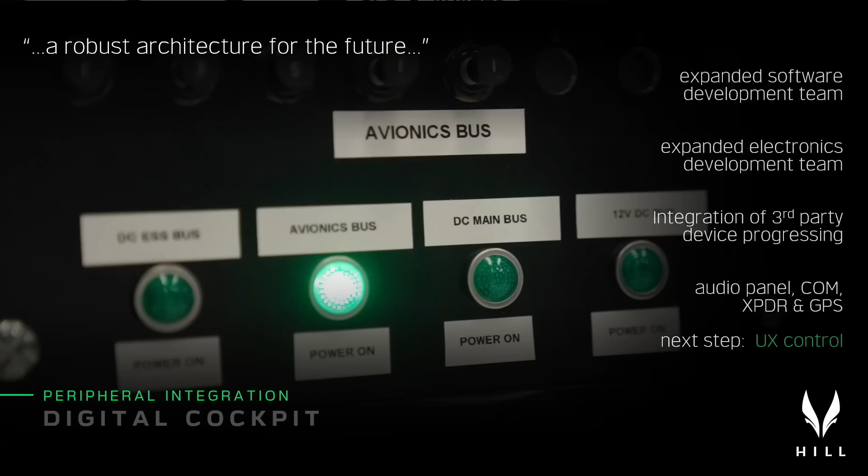Hey, Eric. So, Jace. Target Hardware, you've got it to work. Why don't you tell us all about it?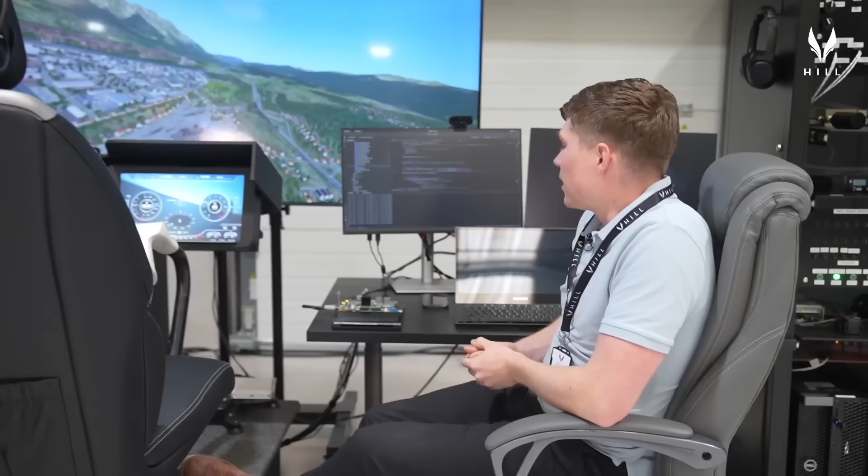Yeah, absolutely. As you mentioned already, before we've been just running and developing things on desktop, which has a lot of compute and graphics performance, which is great for getting things working quickly. However, it's not an accurate representation of what we'll actually be able to package in the helicopter. So we have our strong candidate for our hardware here, which is a popular choice in the industry for both its graphics and compute performance, as well as a path for safety certification, which is important for us.

Over the last few months, I've been working to port the software stack we have to this hardware, which is technical on many levels, both from a compatibility level and from performance constraints, as you can imagine, a lot different for the target hardware. There's been a lot of low-level work, dealing with graphics drivers between the hardware and its architecture and our software stack. But now that we have that deployed, we can actually start optimizing and measuring our performance relative to what's needed for the helicopter in terms of frame rate and all the other things important for delivering a safe and usable interface for the avionics.

So that looks good. What are the next steps from the Target Hardware point of view? What have we got to do to take this all the way up to where we need to be for HX50, where it's all fully certified?

Yeah, so there's a lot to do, obviously. This is a massive step, however. Being on target for this allows us to actually know what we're working with from a hardware perspective. We actually can measure our performance and compare it to what's needed. Now that we have an idea of what we're dealing with, we can optimize it. Because up until this point, we've just been more or less getting things working. But now that we're on target, we can start refining and optimizing the code base, the application from the software level, and refine it so that we're meeting standards.

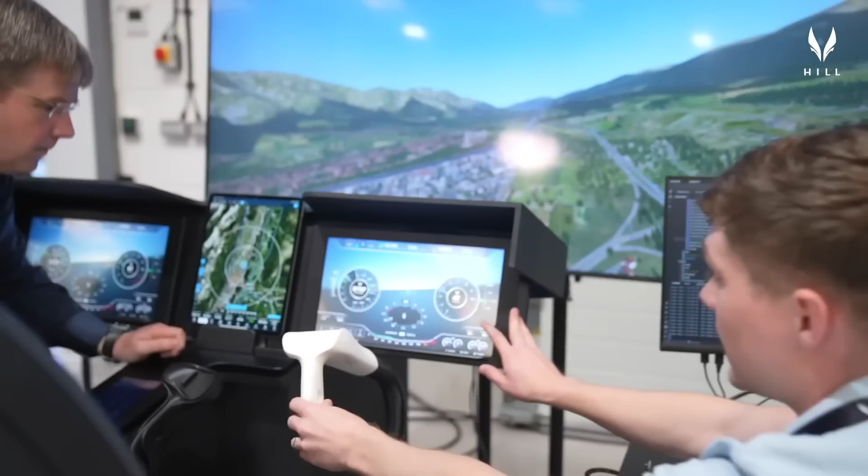We're already doing really well. In fact, I can just get this running here on the simulator, and you can see this screen right here, on the PFD, that is running off our target hardware right now. So you can see frame rate is already great.

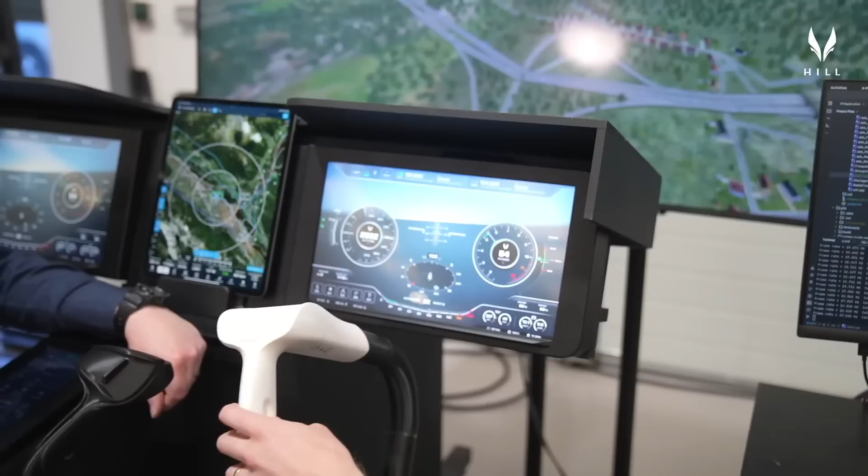We're also controlling the radio and the intercom already off of target with this. So all of that is working, but there's a lot more we can do to improve performance from a graphics perspective, and also for the other interface applications with the other systems.

I mean, it's because you look at this all day, every day. But from my point of view, I can't perceive any difference there. And I know Martin's the same between where we are with this and where we are with the PC hosted version. So it works really well. There's some subtle differences, but yeah, it's looking really great already.

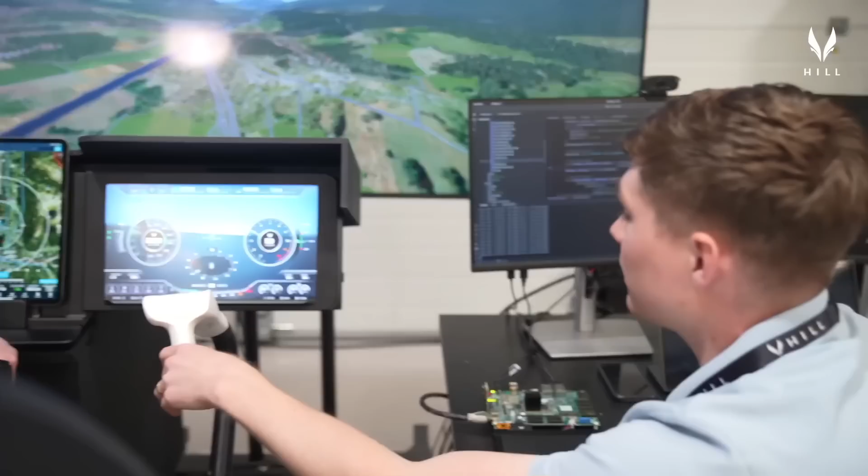Other than that, we have a lot of going through and doing a lot of testing. We've been very much in a prototyping stage, just getting things functionally working. But obviously for something that's going to be in the air flying and has a lot of safety certification aspects to deal with, we need to go through everything and really refine that structure with an eye on certification and the steps needed to go towards that.

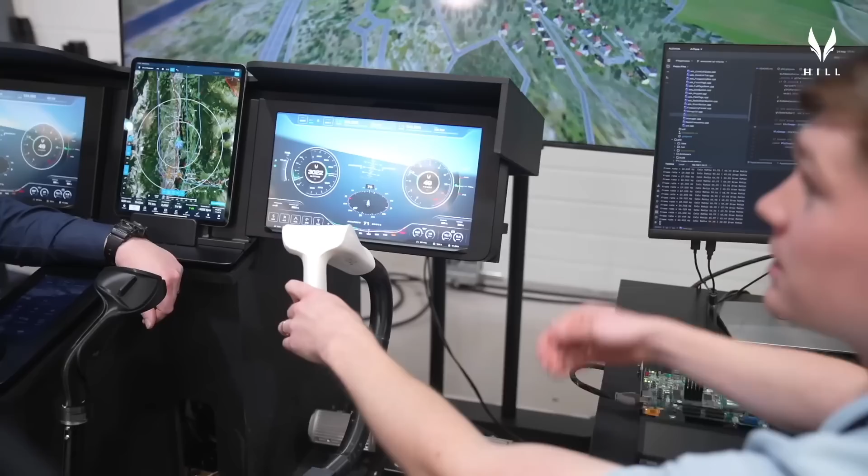Fantastic. Well, I think you've done incredibly well. It's a great job. From my point of view, it looks incredible. It works really well, and it'll only get better from here. Thank you very much. Well done. And I know everybody's going to thoroughly enjoy flying behind this, because it's incredible. Fantastic.

Okay, so when I look at this picture, in some respects it seems like a whole lifetime ago. But since this photo was taken, we've engineered HX50, we've engineered GT50, we've engineered the digital cockpit, we've vertically integrated the entire supply chain for making general aviation aircraft. We've sold aircraft in 59 countries and got a 56% market share, and we've built, more importantly, a global network of people that feel really passionately about helicopters and about general aviation.

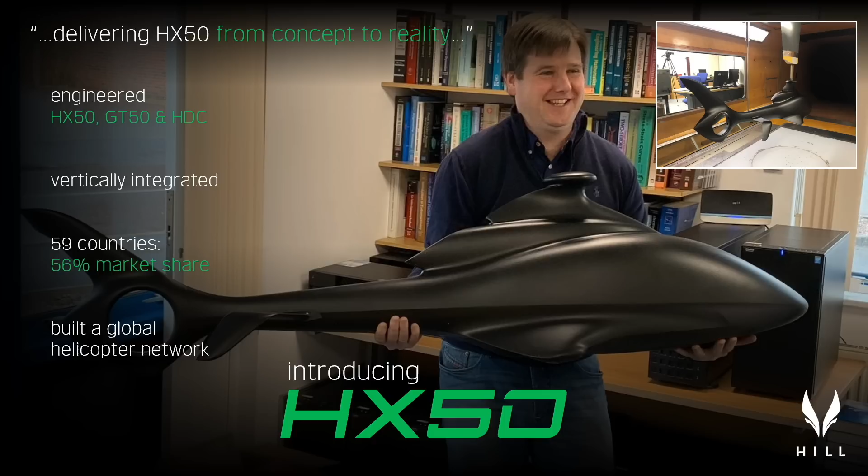Now, I'm stuck in the weeds of this all day, every day. So most days I've got a range of technical problems on my desk. But some days I come to work and something magical happens, and you suddenly realize just how far you've come.

So this is the very first full fuselage for HX50 and the cameras won't do it justice. It is absolutely massive. We promised you that we were going to design a proper helicopter and that when you bought your helicopter, and when you flew your helicopter, and when you were around your helicopter, it would feel like a proper helicopter. And this really does.

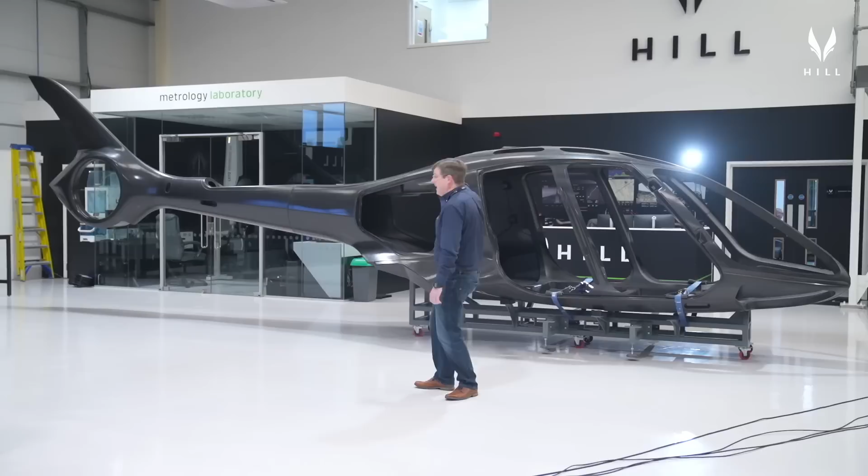So we're presenting it here today with all of its cowls off. It hasn't got any of the engine bay covers on or anything, no doors, but even so, the lines are exquisite and you can really start to see that we've delivered on what we said we were going to deliver.

I know some people out in the public have bemoaned the fact that by the time we get through development, it won't look like that. The images that we created and put out as part of our marketing campaign were taken from the same CAD models that we built the patterns and tools and designed the structure around. So what you see is what you get, and here it is.

So if you look at the size of it, the other thing that you need to look at with this is based around Fuselage 5 that I spoke of earlier. And so one of the things that you can see here as well is just how rapidly we've refined the process for manufacturing the aircraft and for manufacturing aerospace grade composite parts.

The surface finish on this airframe is far better than any of the ones that we've done to date. The detailed features such as the recesses for the doors and windows is absolutely perfectly presented. We've got all of the B surfaces in, so all of the foam cores are in, all of the B surfaces in. We've got the refined laminate book in here, so it's a much lighter aircraft.

This whole thing is about 80 kilos, 75 to 80 kilos, so two people could easily pick this up as it stands here today. It really is a fantastic testament to just how far we've come.

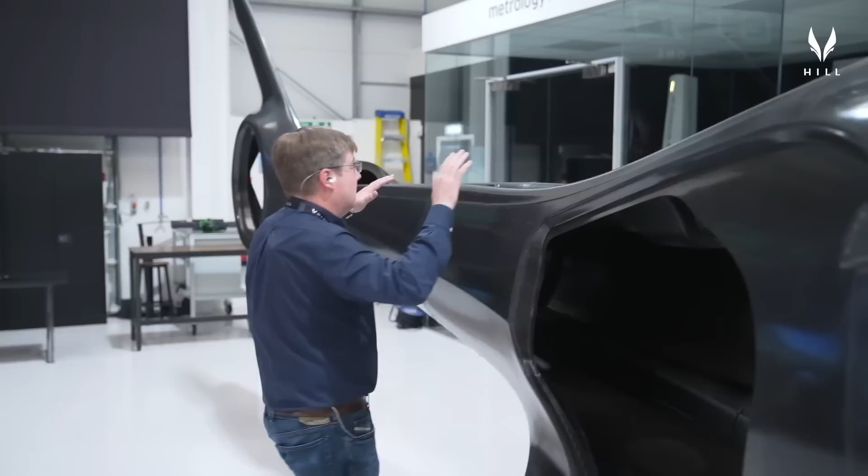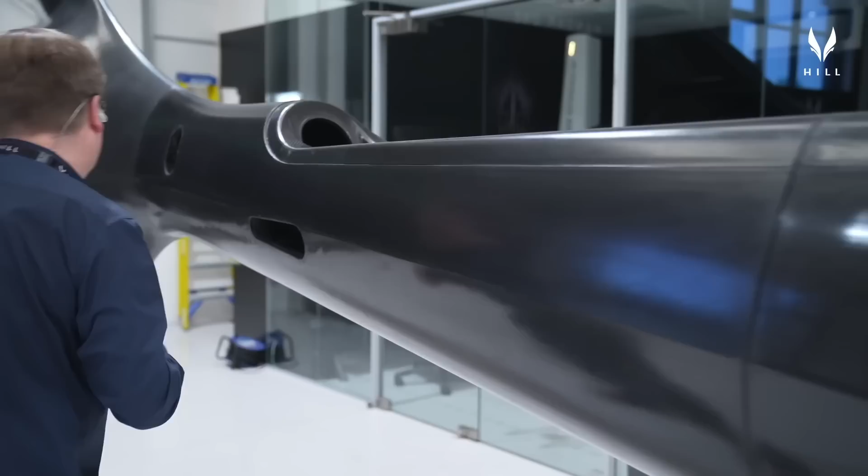I've not pointed out previously that part of the maintenance and inspection strategy for HX50 is that everything sits on this engine deck. What you can see here is we've got a flat deck buried underneath the cowlings where the main rotor transmission sits on the roof. The engine sits in this bathtub here, and all of your drive shafts sit along the top of the airframe under the covers here that are easily accessible.

So we've got a really easily maintainable helicopter where once you've got its cowls and covers off, you can get at everything to inspect and maintain without having to undo millions of screws and take the thing to pieces. So this is the first glimpse you'll get of that.

One of the other features to point out is we've engineered a much deeper ducted fan duct. This essentially allows us to get about 20% more tail rotor thrust for the same amount of power consumed, so it's a big step forwards. We've also done a couple of other minor tweaks around the geometry of the tail fin as we've gone through development to improve performance and the general presentation of the aircraft.

After waiting sort of 25 years of my life, it's been a pretty amazing week this week to see this for the first time.

There we go. So just a quick update on a couple of other little features. Over the course of the last month or so, sales have continued to be very strong. We're now up to 830 sales with 673 X's and 157 C's.

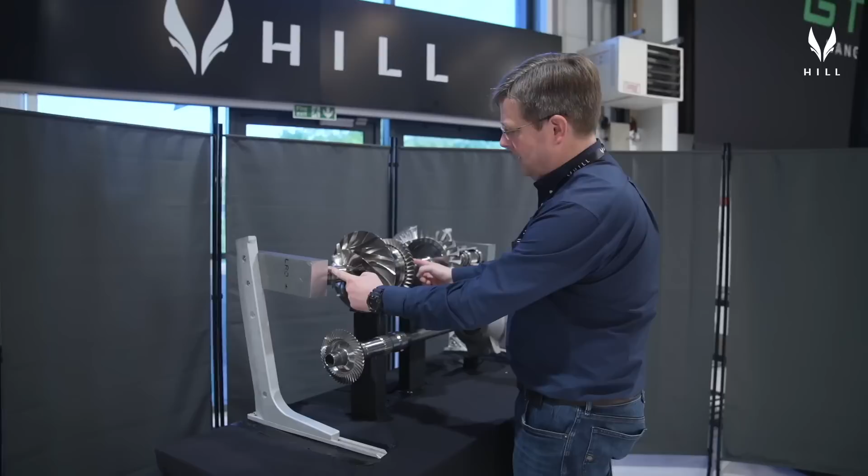Okay, so the gas generator shaft that we saw on the engine rig over there is a self-contained shaft, and then there's - let's do it over here, Josh. Position yourself there. So the gas generator shaft runs from there to there, and then there's an additional stub shaft that plugs into the end of the gas generator shaft, that's a totally different diameter and has a floating spline connection so that it decouples the rotor dynamics - that's the shaft that drives the starter generator.

The starter shaft drives the gas generator, and the gas generator drives the starter generator, so that shaft's still there. The main drive shaft that comes out the bottom of the engine still has the output shaft going up diagonally in front of the starter generator into the main rotor gearbox. That has to be there because the height of this shaft is set by the output from the back of the gearbox going down the tail boom to drive the tail rotor, and getting the engine positioned as low in the helicopter as possible to keep drag to a minimum for a nice high cruise speed. So that configuration hasn't changed at all.

The distance between those two shafts changed when we revised the gearbox, and the detailed design of the connection between the starter generators changed several times during development, as you'd expect. But the basic mechanical configuration's been the same for about 2.5 years. So no, that's pretty stable.

Simon is asking, I've flown the EC-120 for some time, and although they didn't have air conditioning, they were equipped with a blower fan which worked very well. Just wondering if you're thinking about fitting the HX50 with a fan. The cabin has to be ventilated, it's a certification requirement. So there'll be natural ventilation in flight, and there'll also be a fan as part of the air conditioning system. So you'll be able to, like with all aircon systems, turn the air conditioning pump and circuit off and just ventilate, or have it on. So yes, that will be included.

So there's a break between the structure here, and then we've got metallic inserts buried in the composites, in the tail, and the same on the bottom. So we've got 4 mechanical fasteners that you can get at from the top of the tail boom. You can get your hand inside the tail boom through an opening in the back here, and in this current version, you can also get into the back. This has just been done very crudely; we haven't tapped out the inserts properly. But there are 4 mechanical fasteners in there that you can get at from inside the aircraft, whether you come in through the tail boom access or through the baggage bay.

Tim is asking, what is the status of the new manufacturing facility with respect to the government approvals?

Currently we have been asked to produce some further noise assessments for the area to do with the flying, and also some air quality assessments for the manufacturing facility. At the moment we've had some more requests for reports and approvals dropped on us quite late in the day, so I'm a little bit frustrated with that, to say the least. The planners, both within the local authority and our planning people, remain robust that it will get approved. It's a fully compliant bid, but the process is very, very frustrating.

Yes, of course. I'm not going to be left here with 1,000 orders and nowhere to build them, obviously. So yeah, there's only so much I can say about that, but we're making sure our customers' interests are protected.

Terry is asking, can you reveal any solutions to the rotor blade torsional dampening? There's lots of things you can do with that, but none I'm prepared to share. We've got some quite clever ideas with some additional materials you can include in the laminate, but for this first set of blades we're doing, it will be a very conventional approach.